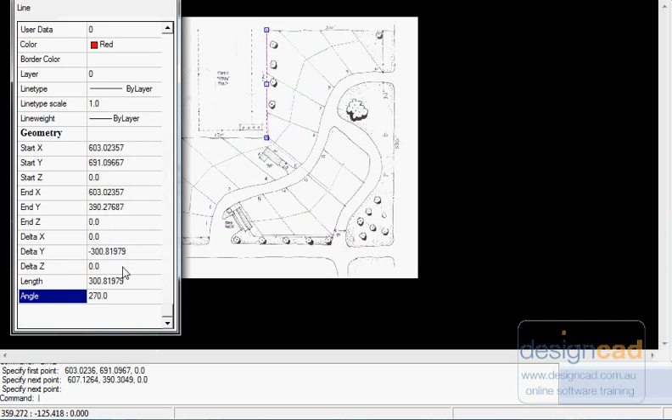The length, give or take a small amount, is currently 300. So that's now reporting 300 units long, and it should be 170. So we can scale the image down so that it fits.

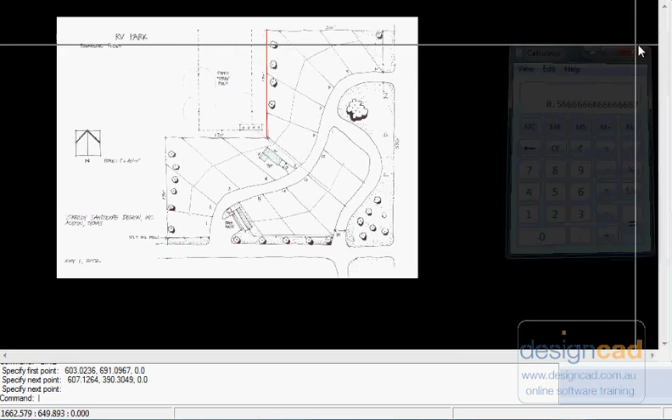I've got my calculator running here. I'll just move it onto the screen here, and I've taken my 170, divide it by 300, and we get 0.566. So I'll close my calculator, and now we're going to scale this image. In fact, we'll scale the line as well.

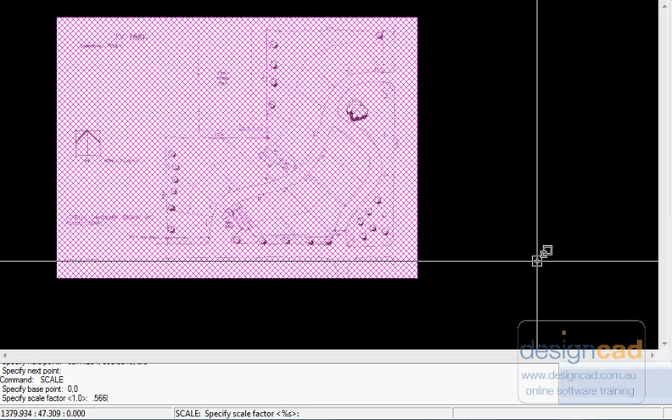So we'll take the whole lot, and we will select scale. It's a good habit to get into, to scale around 0, 0, and my scale factor 0.566, and enter. That's scaled things down. So now when I make an inquiry of this drawing, it should give me the right

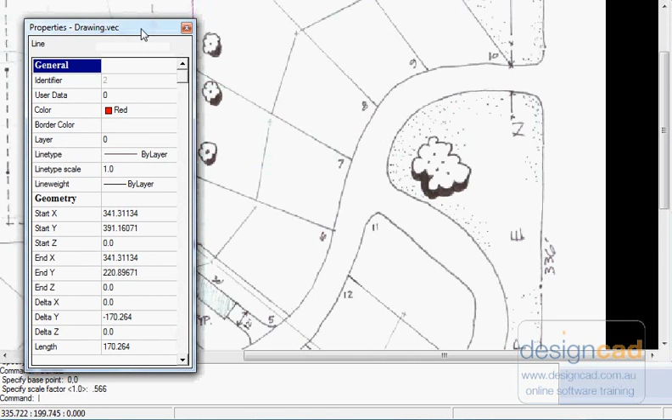sort of value. I'll turn off the electronic grid, which is confusing issues just a little, and I'll now select that line, go to properties, and it's now giving me 170.264. You can't really expect much more in terms of accuracy than that when we're working on a base plan such as this. So we're now in a position to start recreating this drawing, and I'll do so.

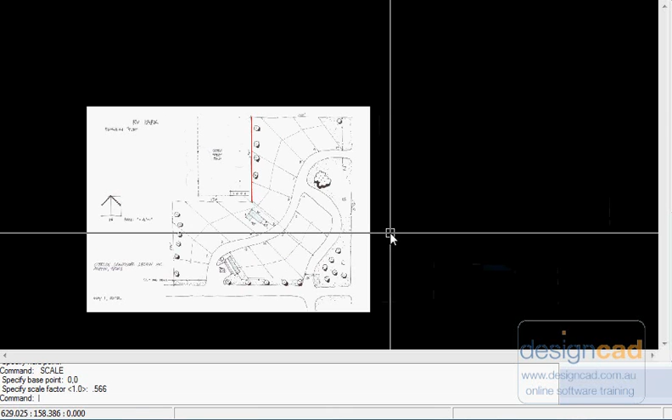I'll just zoom extents. Sorry, something's selected, isn't it? Hit the escape, right click, zoom extents, and what I can now do is pan across, and I can recreate that very same plan in this area to the right of the plan. That means I can keep referring back to other areas within it. So now I'm ready to recreate an accurate version of that scanned image.

If I just zoom in on here, I'll just refresh my memory as to the measurements. If we start down at this point down here, 170, another 170 feet, that makes it easy. Again 170 feet, and then 210 feet in that direction. So I'll change my drawing color back to by layer.

I'll pan our scanned image across, and I'll start the line command. I'll type LINE, and I'm asked for the first point. So I'll simply just click in a convenient place, and we're going to head up in this direction. Make sure that that beige indicator shows so that you can confidently lock it in, and so the line will be drawn orthogonal at 90 degrees straight up on the screen.

Whoops, 170 I want, 170. Type that in the command area down there, and then move away in the direction you want to go in. We're going to go horizontally across now. Another 170, hit the enter key, up, another 170, being careful to make sure the beige indicator is showing, another 170, and then we come across here 210.

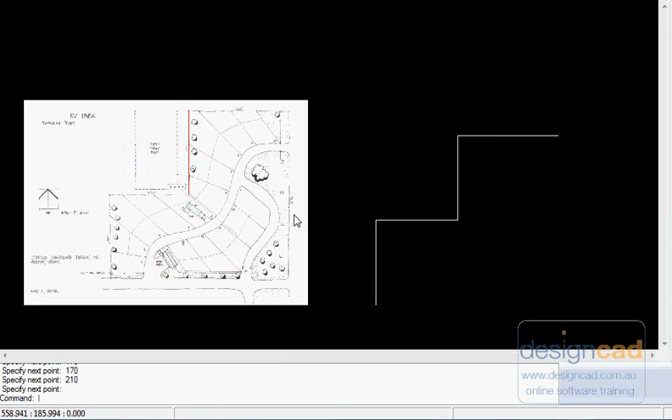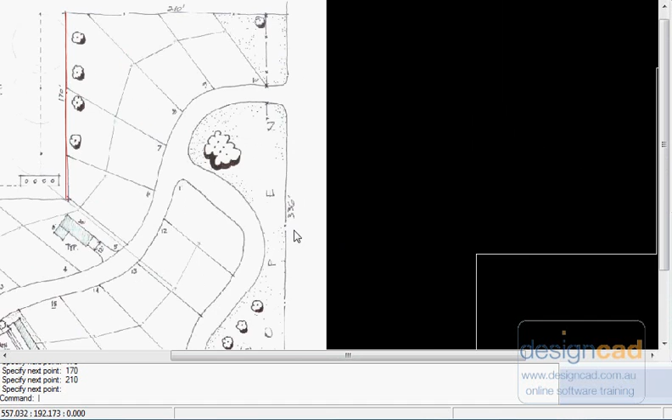Now at that point we've got some of the boundaries of the site in. If you zoom in here, we've got 336 along that line there. What I'm going to do is simply drop a line from the end of that one down in that direction, and I'll pick up the end of that line. So I needed to get back in here and check some dimensions. 336 I need to keep in my mind.

So now we can go to line again, and we can jump to that end point there. If we set OSNAP to end, it will jump to that point. I've been up to the top and picked OSNAP end, and now I come down. 336, and down we go. 336, and enter. So that line is now in.

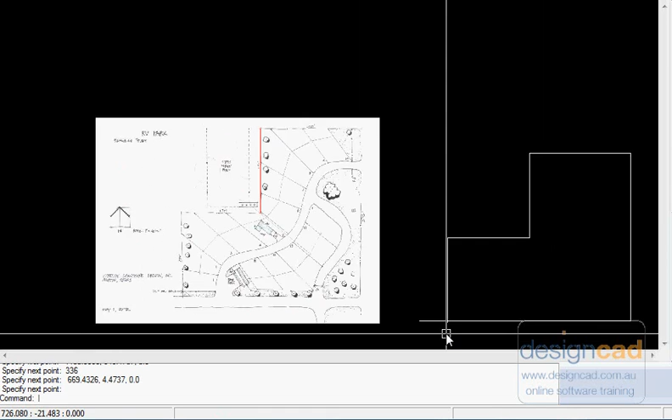I don't think we have a dimension across here, but if we move across there, we can go horizontally out to the left and click. I'll zoom in on that intersection. So there's potentially our small error, with that little overhang, because this line is 170 and this one runs horizontally.

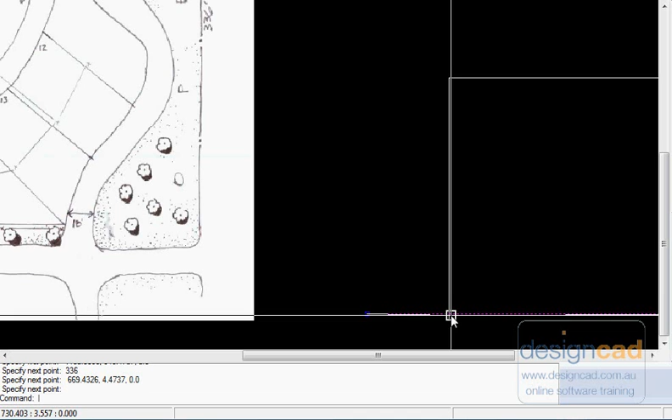Now I have to make some adjustment, so what I'm going to do is pick up the end of that line and make it jump near the end of this line, so the line along the boundary through here will be at a slightly different angle. So there's my attempt at recreating the boundaries of that site.

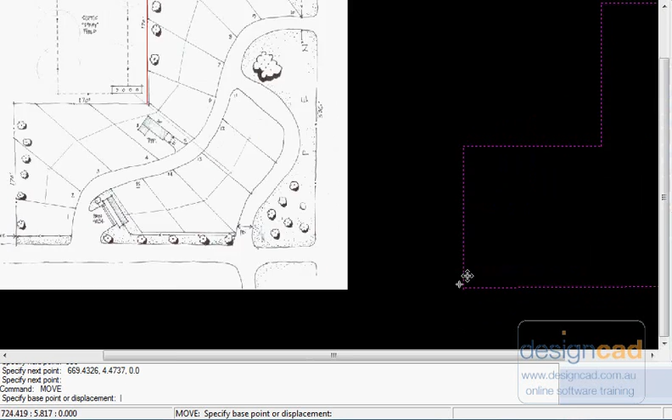In theory we should be able to pick it all up, move it from that little intersection area in there, from that point there, and then come across here and drop it down on that point, and in theory things should show.

Now of course we have a white line on a white background, so each one of those is a line, and I'm picking them up now. I just happen to know that - whoops, now I've picked my image. Might be easier to undo and go back to where we are.

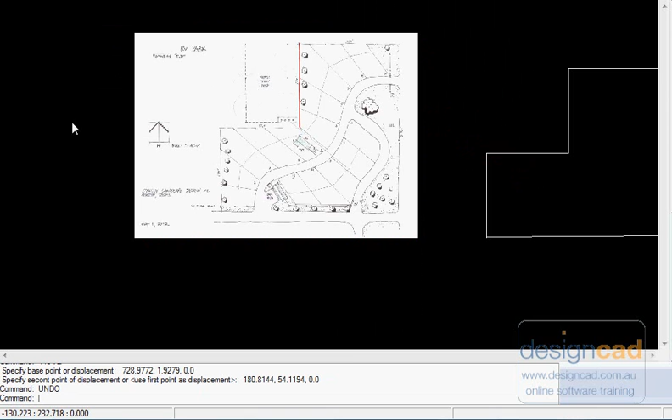I'll pan across, and what I'll do is gather all of these up. I could make that a block, but what I'll do is change the colour of all of those entities to, say, magenta, and indeed I will make a block.

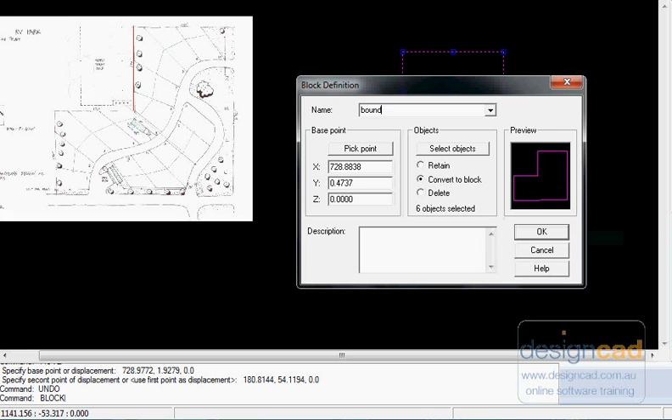So I'll surround that, create a block called boundary, and now it can be treated as one object, so we can pick it up and move it from that corner over to the other corner. We want to drop it in at about that point, somewhere around there.

Well, now we have our accurate CAD model overlying our sketch concept plan, and you can see that there is some degree of difficulty. We have an error somewhere in our measurements, I suspect.

We very carefully drew this red line first to do our scaling from, and we checked the properties of that, and it was 170. I'll double check this magenta line alongside - its properties show its length is also 170, so we haven't made a typing error. Let's just check the horizontal line here, and we check its properties, and it's also 170.

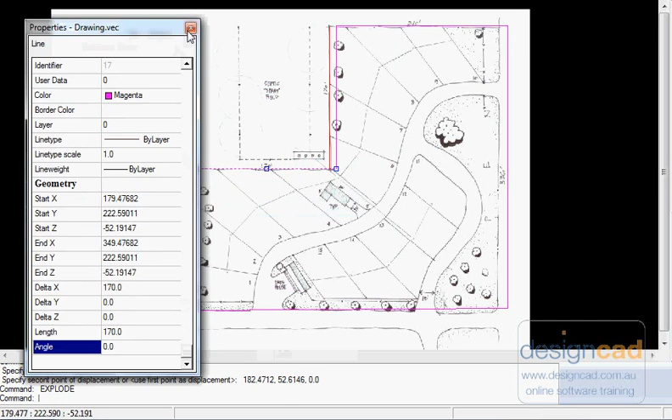So I suspect that in the original plans from which this hand-drawn plan was made, maybe the deposit plans, there's a typo that's occurred somewhere, and we've got some wrong values, or maybe even the scale ruler used to create the hand sketch had slipped a little and we got a small error.

So if we want an accurate CAD plan of this subdivision, and we want to develop it up so that it's a garden CAD drawing, we've got to find out where that error is. And I guess that's the value of computer-aided design - it helps you check things, because a computer-aided design model of a site reflects accurately what will happen when you get out on the ground.

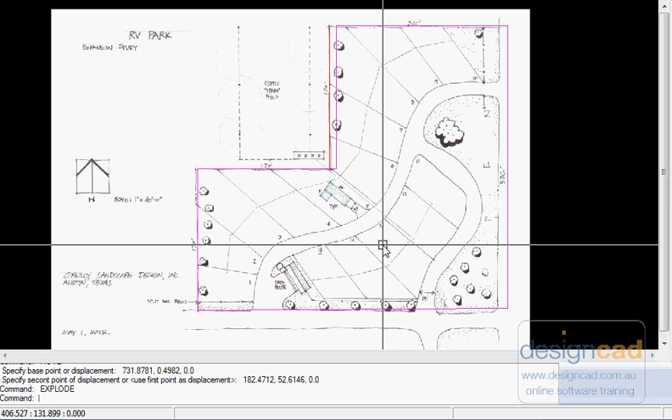A hand-drawn plan with some dimensions on it should also do it, but I think there's an error there somewhere, and let's hope we can find it.